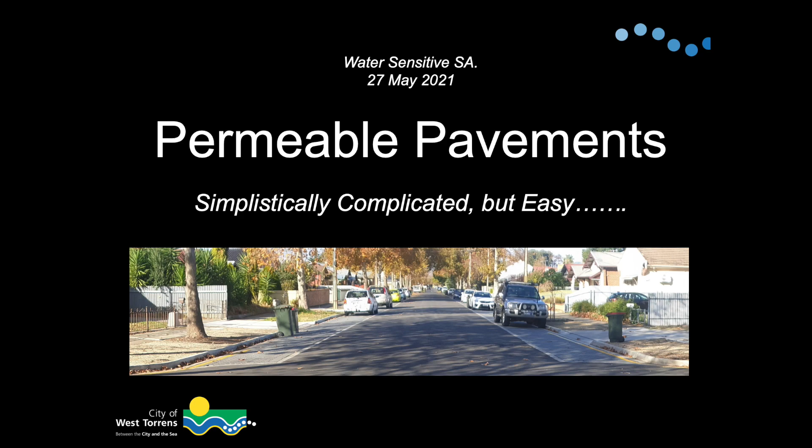I like to have an interesting presentation title, simplistically complicated but easy. And there's legitimacy to that - simplistically complicated but easy, so there's no excuse to not do it.

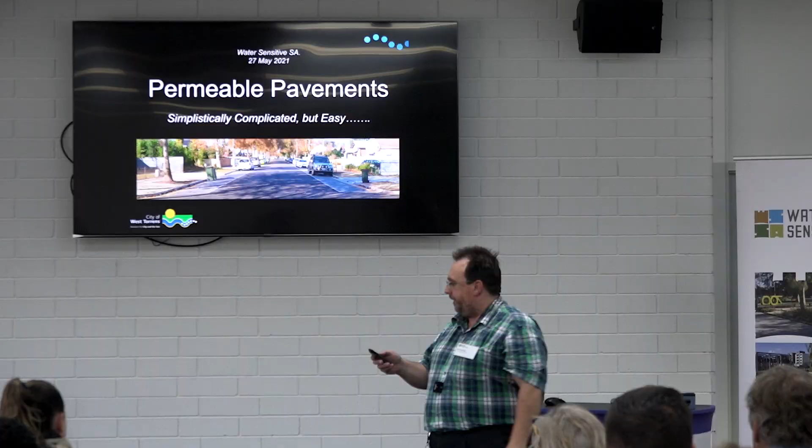Simon, I had an interesting chat with Simon. Simon came to South Australia in 2006 and started talking about permeable pavings the hour after he left off the plane. My first project I'm talking about is 2007. So Simon's presentation convinced me, back that number of years ago, that this is a good deal, get on board, and ever since then they've flourished.

I like to put this up because most people don't realise what's going on. South Australia has a water-sensitive urban design policy by the state government, a policy document - the only policy document I'm aware of in the state that doesn't mention the fact it's a policy document. And best of my understanding is it's still valid.

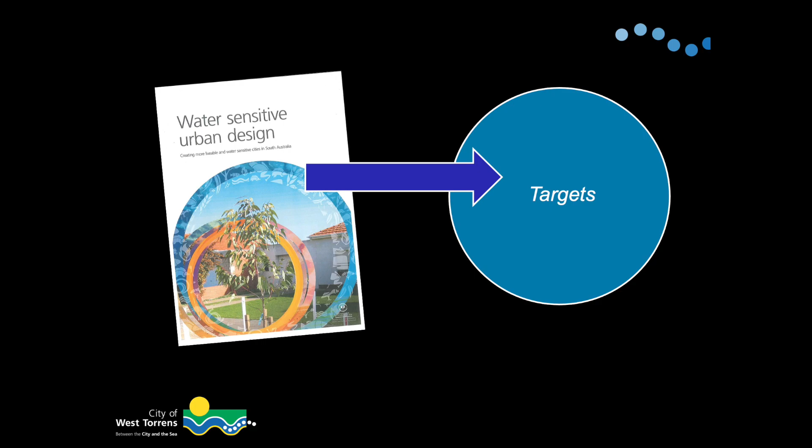That explains what water-sensitive urban design is. Permeable paving is an element of water-sensitive urban design. The other thing that people tend to forget is that document has targets in it. And in part of the new planning system that went live a couple of months ago, there are elements of those targets for the very first time being reflected in the new planning system, in parts of the planning system. So that's one of my side preachers.

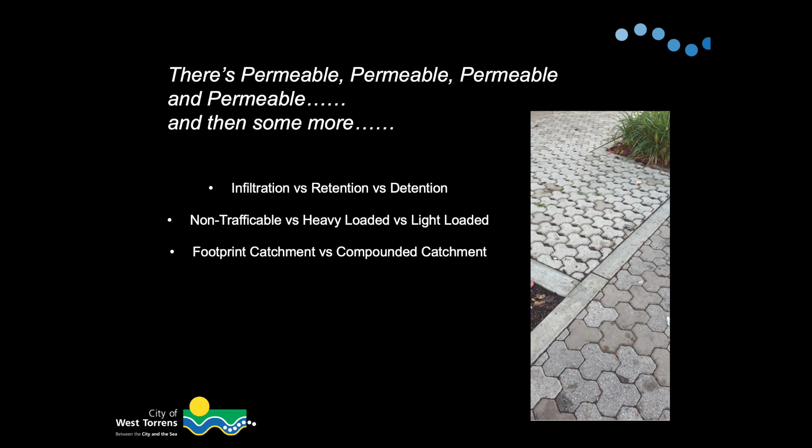There's permeable, and permeable, and then some more. Others have touched on it. I actually think one of the greatest misses with permeable paving is that we use the word permeable paving, but it catches so many different scenarios. And for those that aren't initiated into the gang, there's potentially a belief that it's singular in its use, application, benefit.

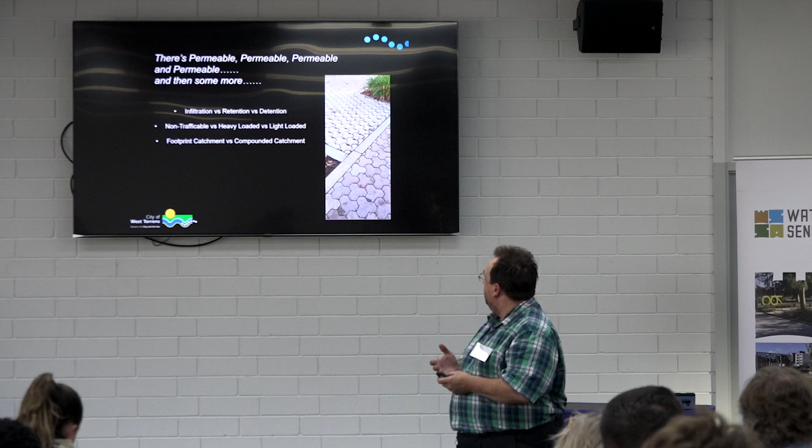You've got infiltration designs which are different from detention designs, which are different from retention designs. You've got trafficable circumstances, heavy trafficable, light trafficable. This leads into - we didn't cross-compare notes beforehand - some of the previous. And then you've got systems which are just the footprint of the installation, but you've got those that also have a compounded catchment, but no more than 1 in 4, because then you get told off. So even looking at that, you've got a dozen to 20 different combinations and variations that you could use.

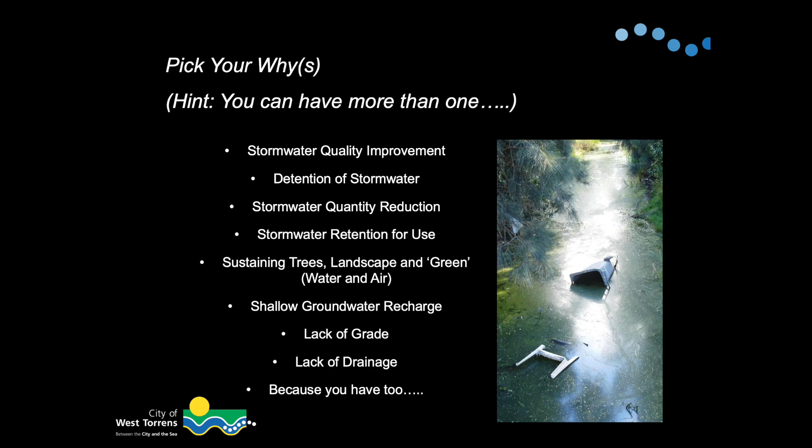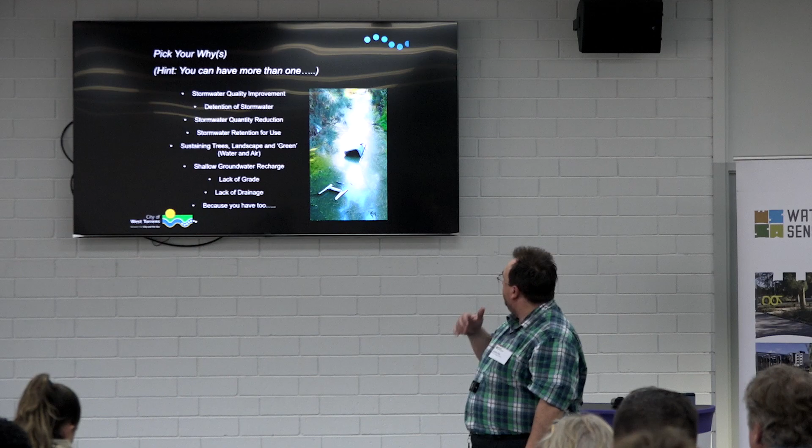So understanding that, but more importantly, understanding why. Pick your why. And the good news here is it's a smorgasbord and you can have all of them, or most of them. You can have as many whys as you want. And we've heard of most of them touched on: water quality, detaining or slowing stormwater, reducing quantity of stormwater, sustaining trees and landscapes, just the idea of putting water back in the ground, offsetting some of the loss of natural permeability of our suburbs.

Some I haven't heard talk about yet is lack of grade. Permeable paving is a great way of fixing a location where you can't get water to grade out, or you don't have drainage. And for some of you, it's because someone else is telling you have to do it. Valid reason.

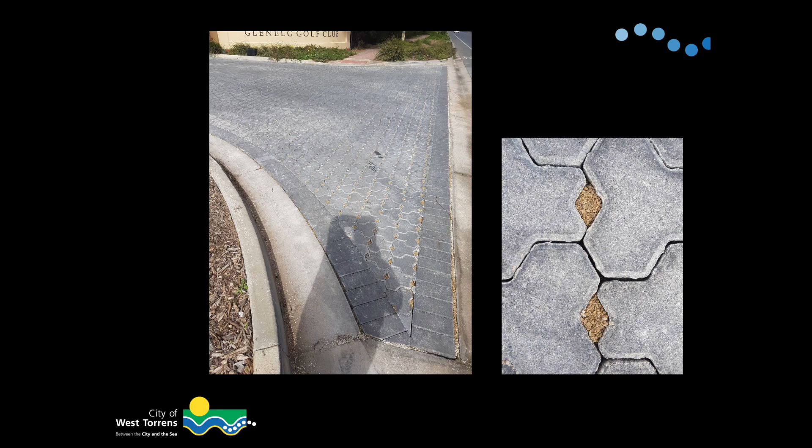This is what it looks like now - permeable paved surface. The reason we actually used this was, again, a lack of grade. West Torrens is ridiculously flat, and our designers were actually struggling to get all the falls to work so that this water off this area, which was imperviously brick paved beforehand, could go somewhere. So this is dead flat, and you can do that because it's permeable.

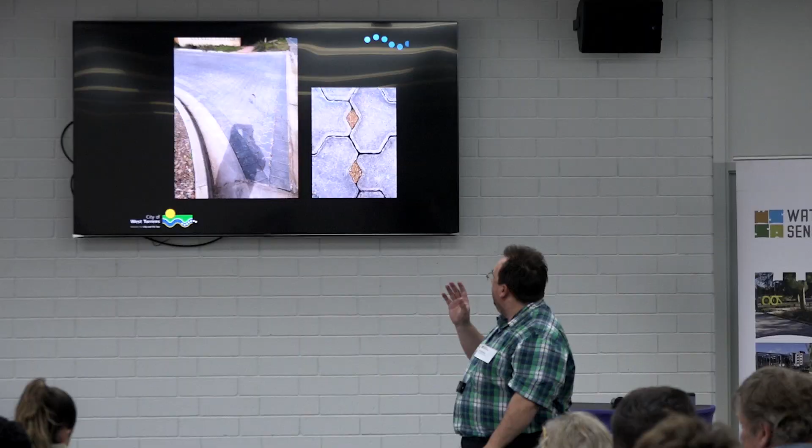The other thing that's noticeable about this is James Melrose is one of those 60-kilometre-an-hour roads where everyone does 70. I should fix that sometime, but so you also then have - it's a long stretch with not too many accesses. So you have people sort of somewhat tearing around this corner and tearing to get out in between breaks in traffic. That brings about lateral shift load.

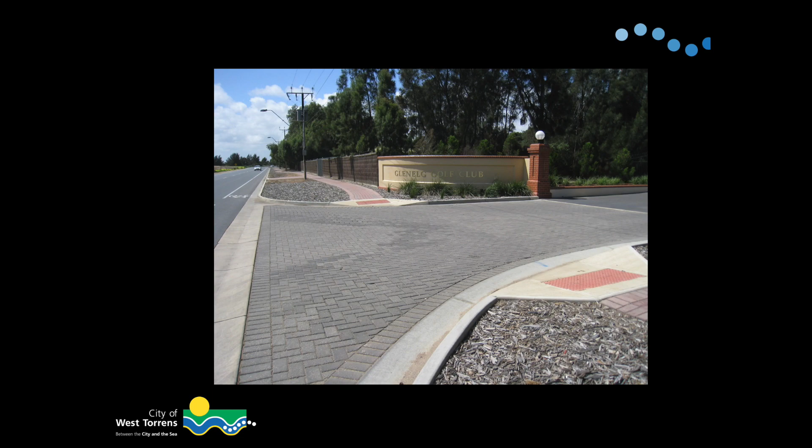That's how it was originally built - rectangular pavers, probably similar to what we saw in the car park out over here because that's what we were using at the time. Anyone see anything in that picture that's giving you some inclinations or hesitations? Or can anyone see a little bit of a colour change in the paver?

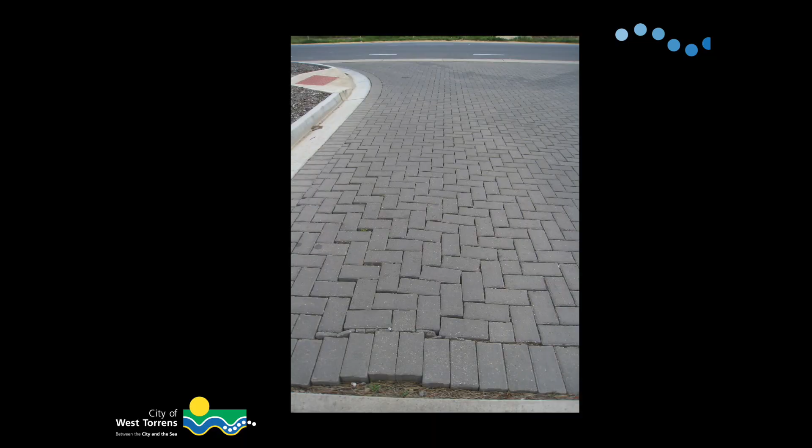Dun, dun, dun! This is why you don't use geofabric, particularly if you have lateral loading of vehicle movements, braking, accelerating or movement. So the traffic moving on that has actually over time shunted all the pavers up to the point where, when you go out there, we were pulling pavers out left, right and centre - nothing was attached to each other. So when we rebuilt it using the Trihex, we ripped out the geofabric layer, put the screenings back down, and the Trihex has been good since then.

That was the detail that it was originally installed to. We probably went overboard with the sub base.

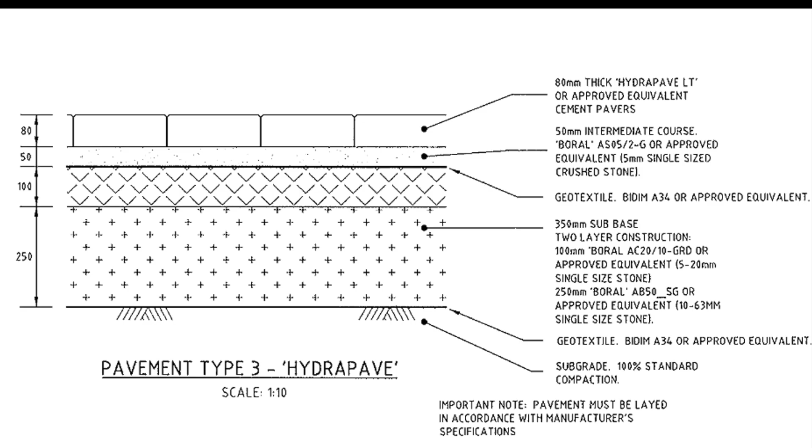There's another project that we worked on.

I have to disagree with you, Simon.

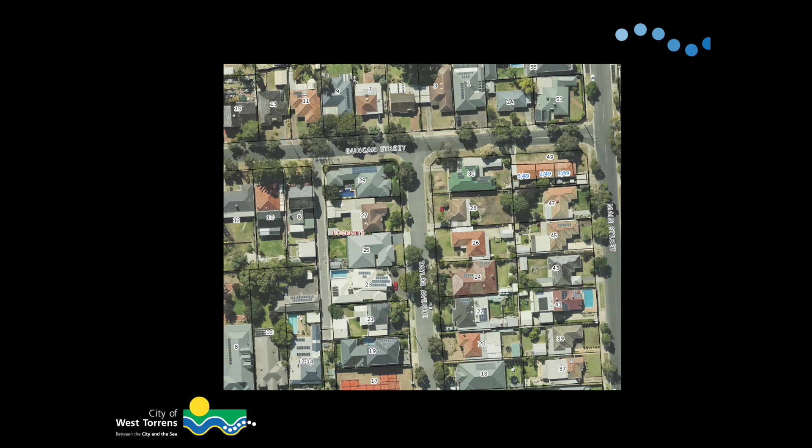This is a 100-year design standard project. Just in here, there's a little laneway.

It's a laneway which all falls downhill towards the no-through end with no drainage. The other thing that doesn't make it too good is that the way Duncan Street is shaped, most of the runoff from in large storm events from the far side of the road actually sheets across Duncan Street and in higher storms can fall straight down into the laneway.

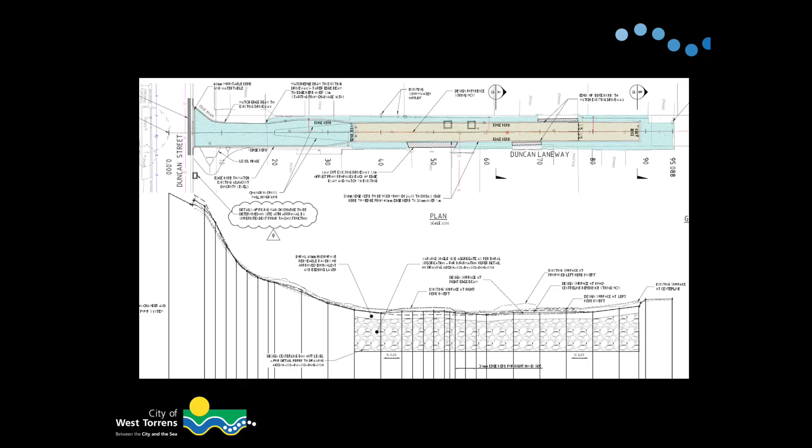So you can see there's Duncan Street up the top. In cross section, it falls down to a laneway which is flat, and there's another house off the bottom end here.

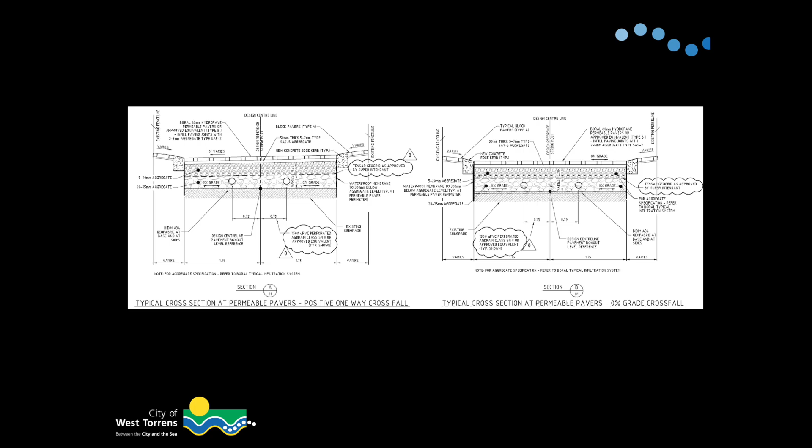The design is pretty similar to what people have talked about. We've actually designed the storage element of this for 100-year storage. It's a project that has a pump station on it.

We've left it with only a geofabric layer on the bottom, so there is some natural permeability to the floor, but the ag drainage there does connect to a pump station.

It pumps the intermediate and larger flows up and out, and the storage volume in there is enough to buffer that 100-year flow event so that we don't get people in trouble.

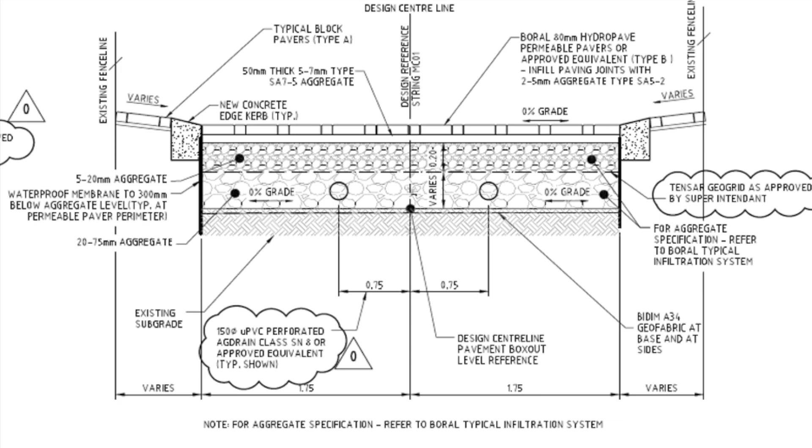We've also, because we're a metre-ish off the boundaries with the permeable, put in impermeable barriers down the side just to discourage sideways movement or infiltration into the side walls to the footings of buildings.

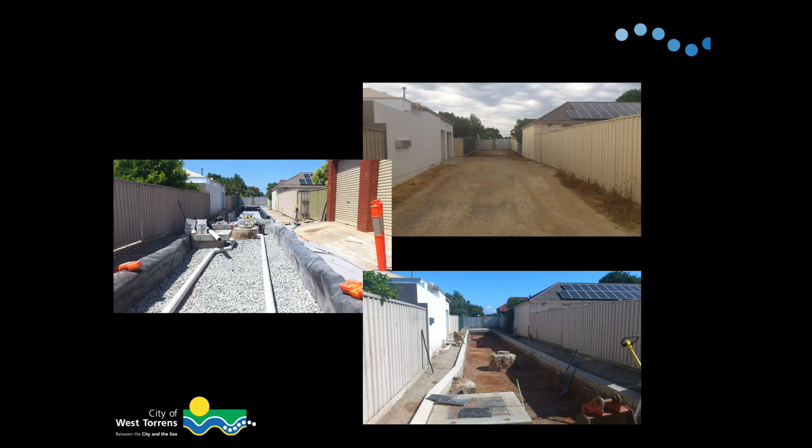In construction, it aligns with what most people were talking about. We had to work around services, and then here's the finished project.

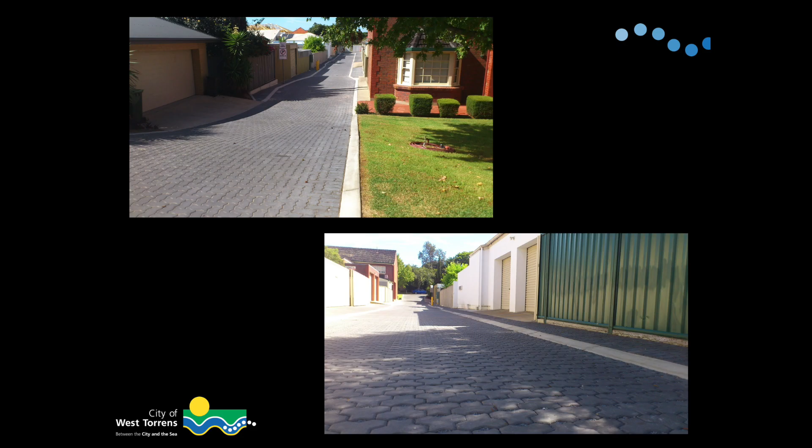Again, most of that laneway is pretty flat. Definitely everything underneath was all cut and squared. Contractors love building this because you cut square, everything is square and level and flat, and I don't have to worry about getting the grades or whatever else.

We wanted to do an urban design project. We got strong public feedback that we needed to keep some of the trees in this street and not reset all the trees in rebuilding the road.

So we took the trees on the right-hand side as you look at it there. We've actually run the concrete ribbon edge beam down the road, a representation of the fact we're right on the edge of the winding River Torrens.

But if you look at them closely, everywhere that ribbon comes out is pretty much on the drip line of the existing trees we've kept.

So we've got permeable paving underneath the drip line of the trees, picking up basically what lands on it. Everything else on the road drains off, so it's not overly saturated, but it's providing benefit to the trees.

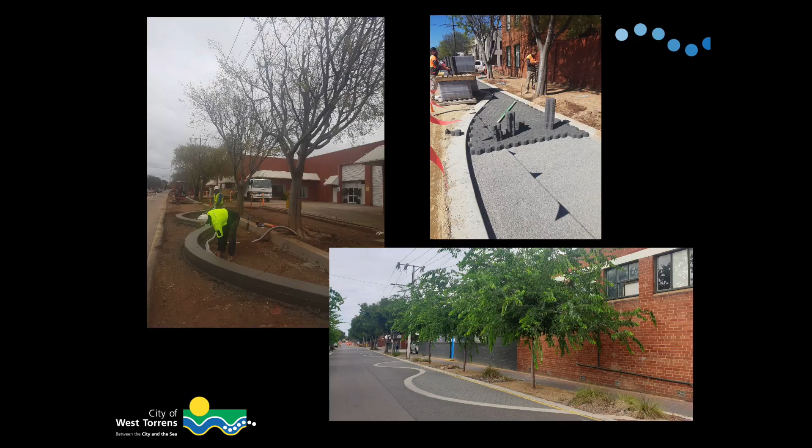The ag drainage underneath—these are new tree installations on the bottom that have just gone absolutely bonkers, A, because they're getting water, but B, because they're also established in a supported cell installation. The pavers going in.

This is the sort of typical design. We've got a relatively shallow formation draining to the ag, and then coming back, and that ag drain is actually draining to wells and infiltration right at the toe of the trees.

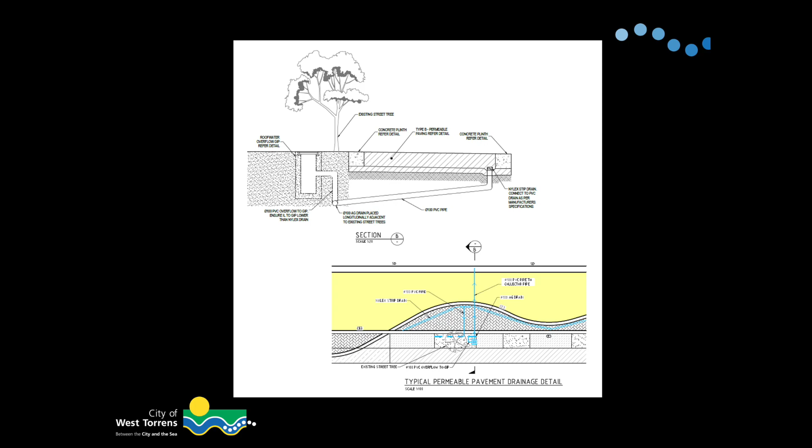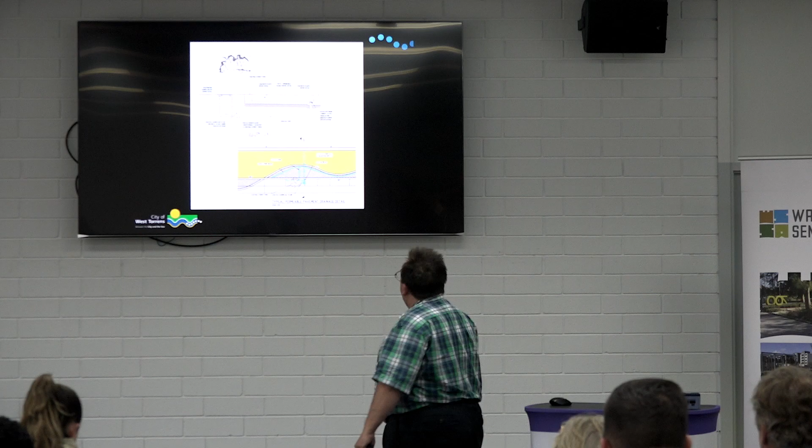If we get the mother of all storms, then it exceeds the capacity of this in a very uneven way, and we would still get overflow onto the road, the rest of the road that falls away, and into the formal drainage.

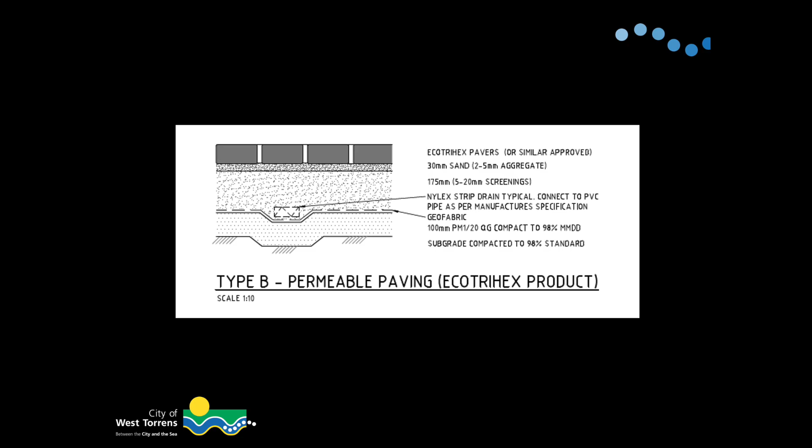175 mils of screenings on the bottom of that one. Again, we've learnt now to put the fabric so things don't slip and slide around. I always forget the name—Stevens Avenue.

With a lot of the stuff that we've done, I used to creatively share with Russell King, who used to be at Mitcham. We thought about opening a consultancy called Chess, two Kings. Sorry, I thought it was good.

He copied some of what I did, I copied some of what he did. We shared details, we refined each other's details, and there's a street in Mitcham that looks very much like that we were doing at similar sort of times. Basically, the car parking bay along the edge of the road, great big plane trees to soak up all the water, full length of the road. I think there's 200 metres on each side of the road of parking bay.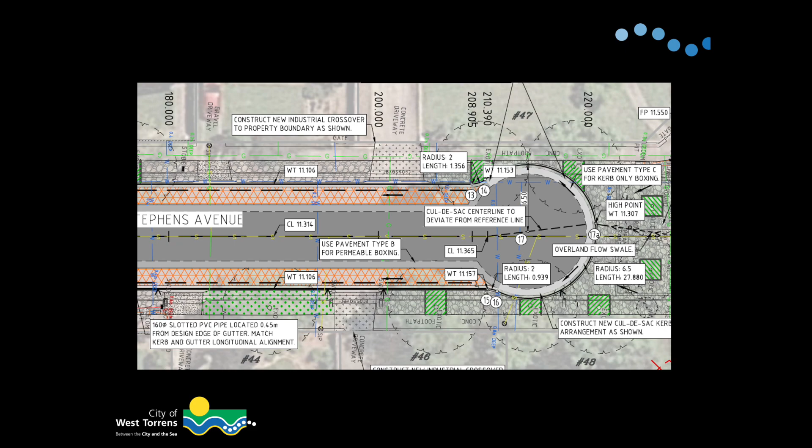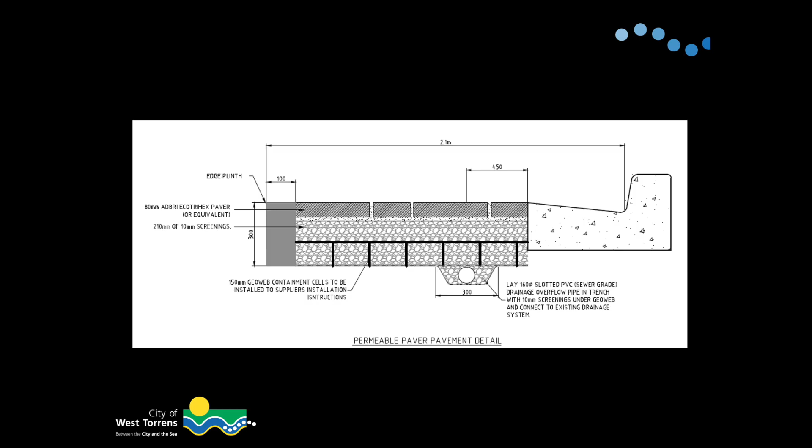We also brought the kerb in to build it further away from the tree. So the permeable is the orange hashed. And again, this is where we started bringing it. These are sort of moving through in time frame. This is where we started using a Geoweb in the bottom to help with shallower depth, and also more support for that base, so it doesn't want to move or sink or move around.

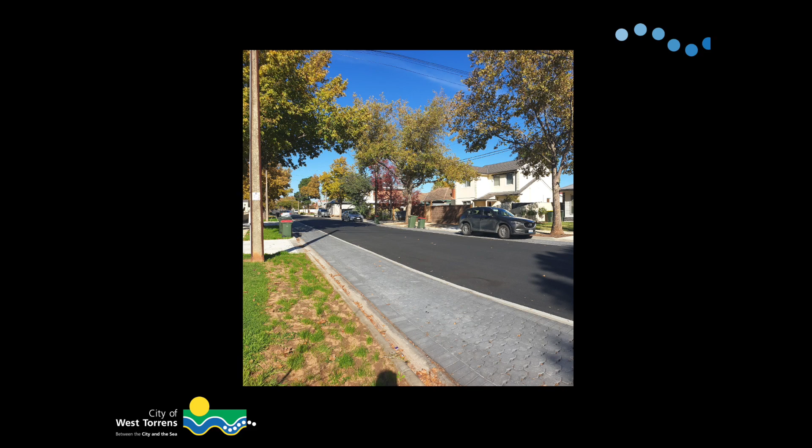That's a photo from this morning. I'm kind of one of those last minute organisers of my PowerPoint presentations, but the photo up the top left is actually the Mitcham project doing the same sort of thing. It was the only one I actually had of an open trench.

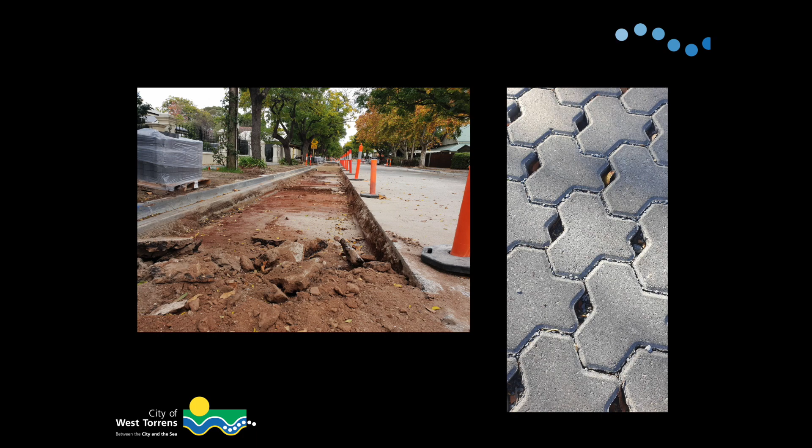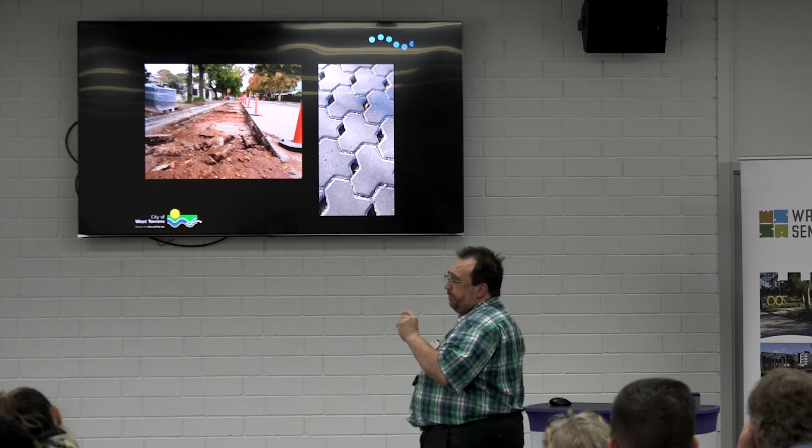The one thing I do note consistently across all our permeable tri-hex projects is the loss over time of the top couple of centimetres of fine screenings in the gaps. And my suspect is it's the bloody street sweepers. Because I think, particularly on this project, where we don't get as much genuine traffic load over it, it's either something to do with car tyres at speed going over and suctioning the fines out. I don't know, I'm guessing.

But given it happens on this street where the cars are predominantly parking, not driving along that lane, I think the key thing that does happen is the street sweepers. So I put it down to the street sweepers. It hasn't really shown too much detriment to things, but we probably should get around and top them up every now and then, send someone out with a bucket of fines and fill them back up again.

We're also going to have permeable, so this is purely just to take, filter through and drain off, get some water quality improvement. We're also going to do some permeable paving in those bottom 4-5 spaces, which we were going to do as a deeper pavement as a storage. We were going to run the runoff from the building direct into that pavement and have a reduced outlet to get a detention benefit by using the pavers for detention purposes, not necessarily pulling a lot of water in from the top. That's that car park again this morning.

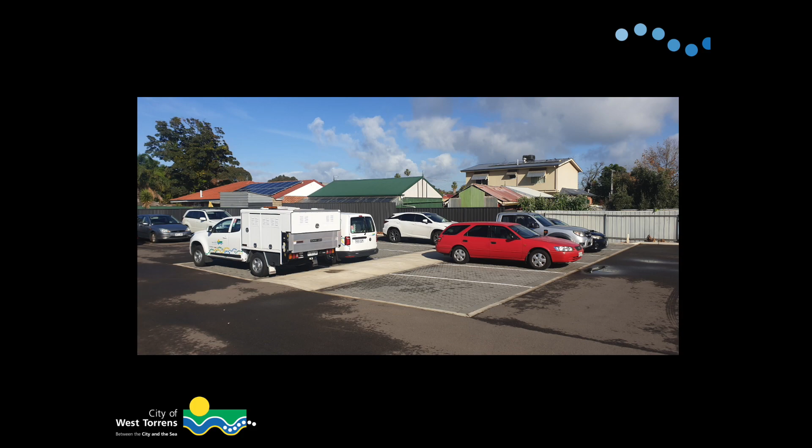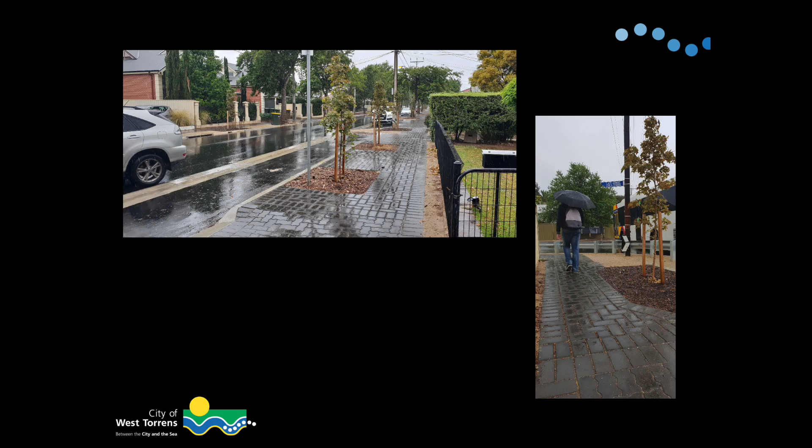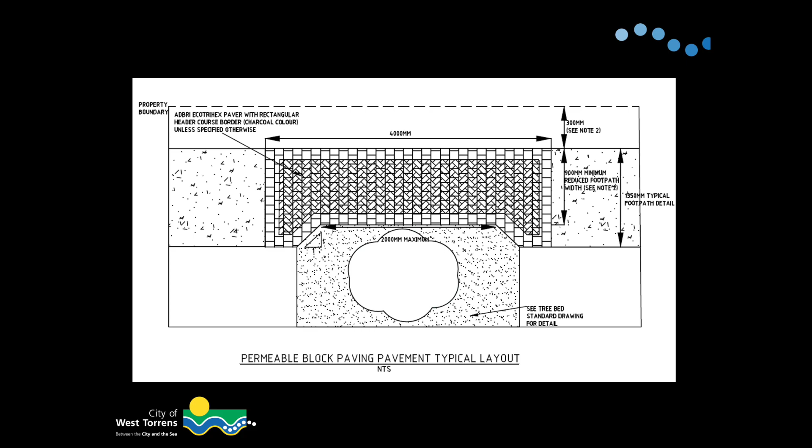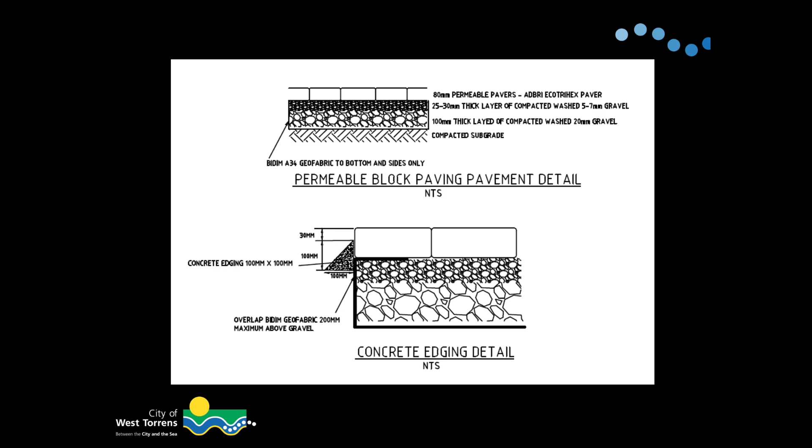Permeable paving of footpaths is another one of these games I used to play with Russell at Mitcham, where we've developed standard details for reduced paving width and permeable, largely because of the benefit it provides to trees. So again, standard detail that we've developed for permeable paver infill. And again, one of the things we've tried to do, backwards and forwards with Mitcham, is we've tried to design this down to a depth and a material quantity that's as closely comparable as we could to a conventional brick paved footpath.

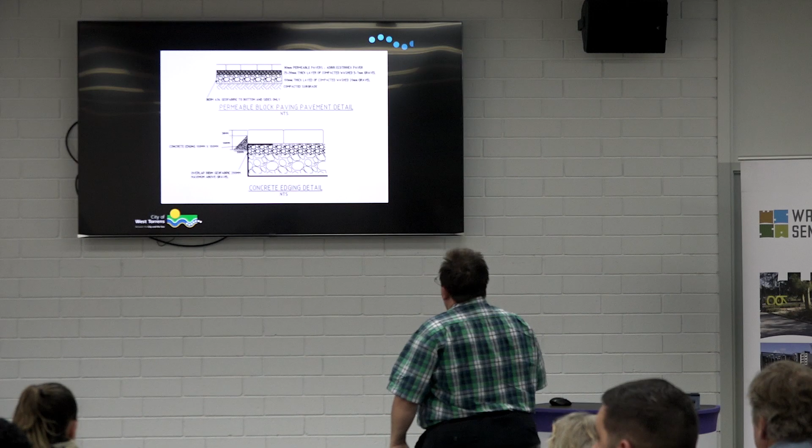Not too far off. Geofabric, wrapped in underneath the brick, and again the edge restraint that Simon said is quite critical. Even though we kind of know what we're doing from it, so that's another project where we've seen all the prepared permeables through the street.

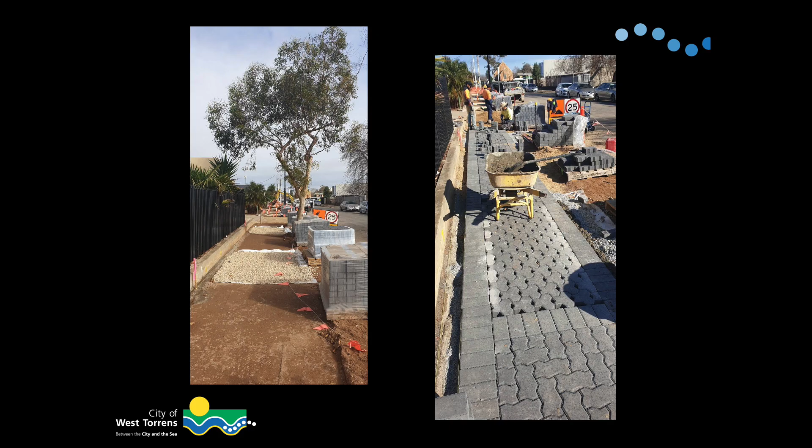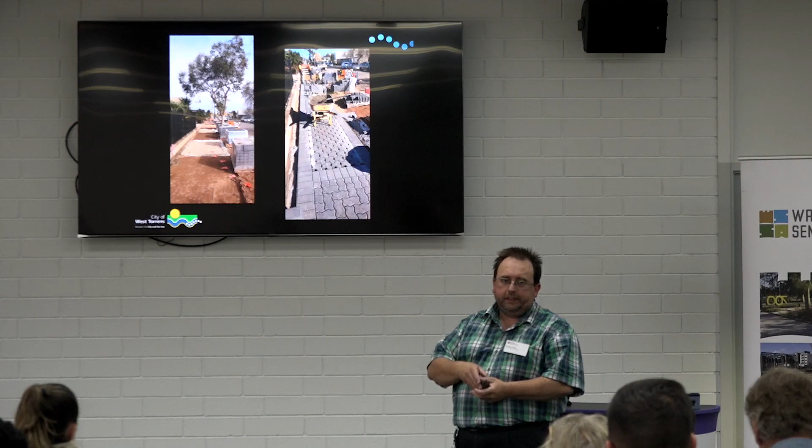There's been actually a lot of conversations with the brick pavers about whether you bring the larger right up to the bottom side of the brick or the finer screenings on top, about what's easiest to work with. Again, if we had one lot of material being brought in rather than two lots, there's a dollar saving to that. And realistically, in my mindset, the finer screenings are predominantly about the ease of getting a smooth bed to put the pavers on. You get a contractor who's happy to use the larger screenings right up to the underside of the paver, there's a little bit of a dollar saving in that.

Mind you, anyone notice what's wrong with that picture? From the detail I showed you before, who's paying attention?

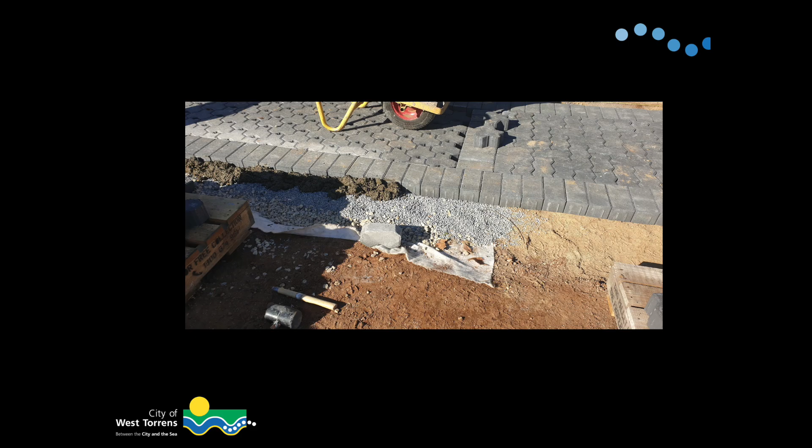You can see the geofabric, you can see the screenings, and they put the concrete on the screenings, and nothing's holding the screenings in. So that concrete is just going to slide out. This contractor lost their profit margin because they had to go back and rebuild the edgings of most of these. So even though we know what we're talking about, you still need to have someone knowing what they're talking about, working with the contractors.

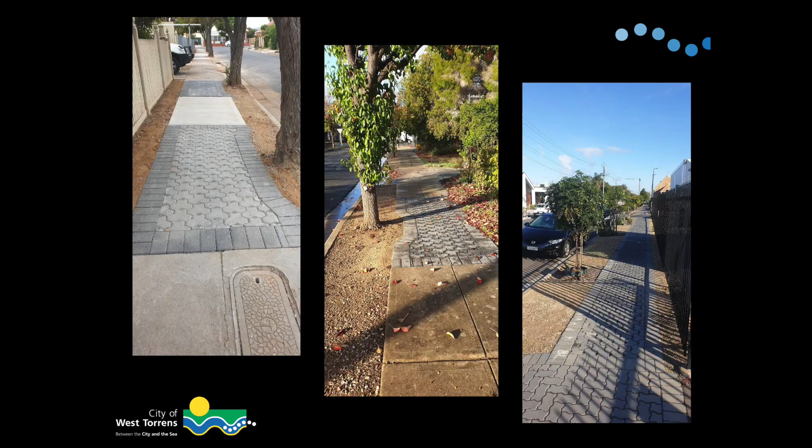And again, same thing. This one was a lot of small trees, so we just did the whole run in permeable rather than trying to break it up. We're patch filling in existing concrete footpaths with the permeable. So instead of just pulling up concrete slabs where they've been lifted by trees and putting more concrete back, to come back in 5 years' time to lift the concrete out again because it's lifted again, instead of putting the concrete back, we put the brick back.

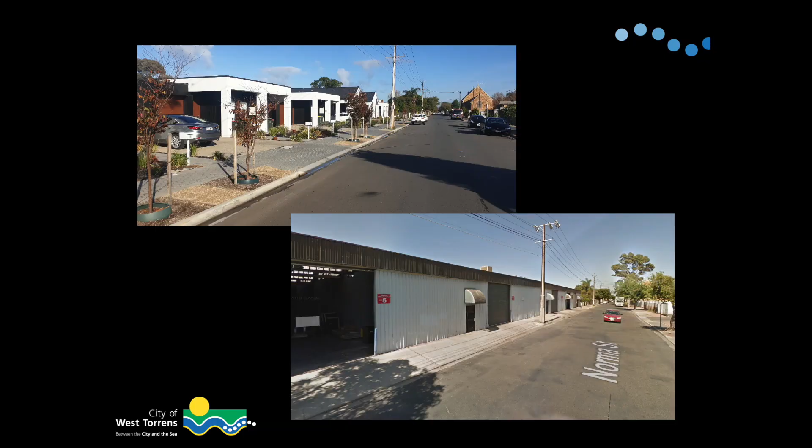Why do it yourself when you get someone else to do it? Pay for it. This street used to be an old industrial garage, went to a residential development, basically the developer had to rip up everything and do everything in the verge. So we made them do permeable past all the trees. Driveways aren't permeable, but adjacent to the trees there's permeable. And the developer paid for the vast majority of that.

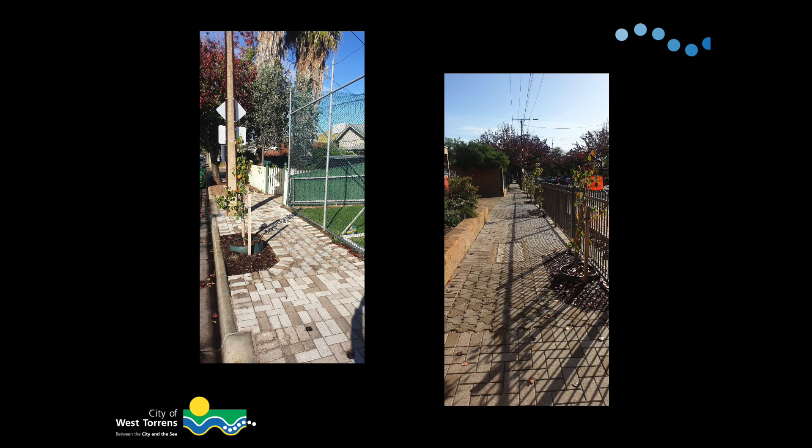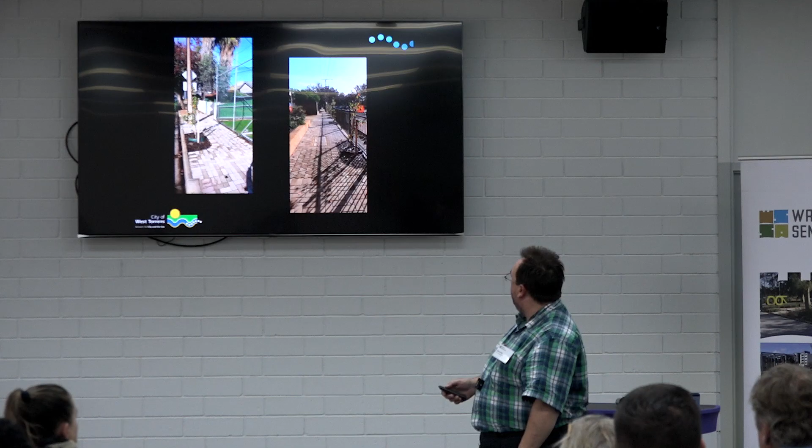And again, even starting to play around with different colours when we're doing more upscaled locations. That colour mix we're actually starting to use more often now because it sits more comfortably next to old concrete footpaths than what the grey does, and mindful that that's probably a lighter colour and therefore has less urban heat impact.

And when you go to something which has the tri-hex pavers all the way through, and I think Simon or one of the other speakers mentioned it, here's your impervious surface blending straight into the permeable surface, with changes in formation underneath, obviously, but someone walking over the top of it isn't really going to notice.

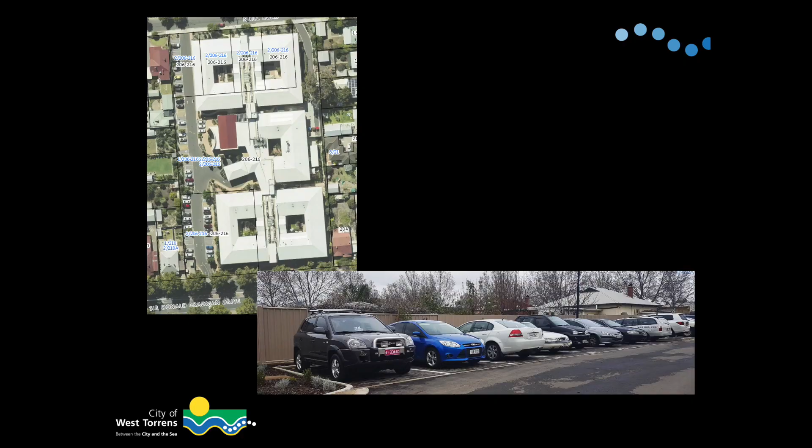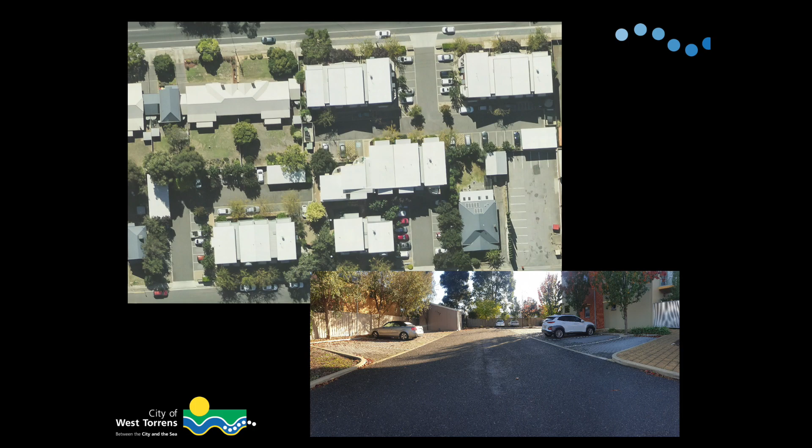Developers, simple and easy. A nursing village, nursing home, all the car parking spaces are permeable. The roadway is paved, exactly what we've seen before. An affordable housing multi-storey unit development. So affordable housing, you think trying to reduce price. Again, same principle. What convinced them is that they were actually able to undertake most of the stormwater detention for the site in the pavers rather than having separate tanks.

So when they offset the fact they had to put tankage in, and you just add your paver depth a little bit deeper, the formation underneath a little bit deeper and achieve it in that, suddenly they were sold on that. What's good about that and the development thing, so we were talking about legislation versus bottom-up versus you convince them once and they come back.

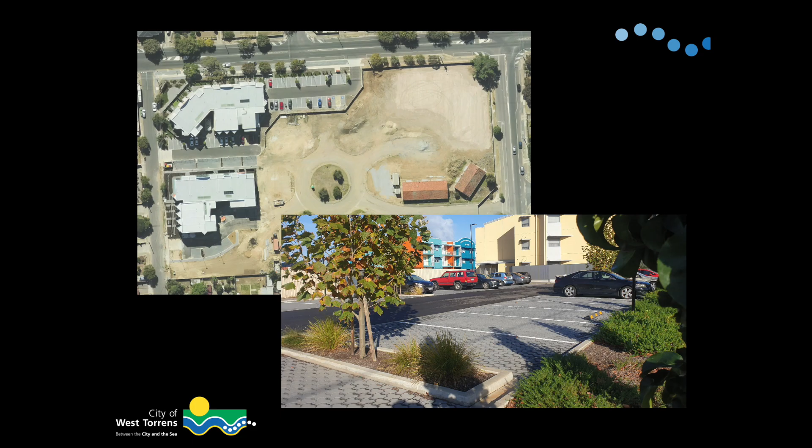Same developer is now developing that whole block of land with these multi-storey affordable housings. Every single one of these car parks came to us the very first time we saw the design with that car park approach from the other side. So there was no hard sell because they had already realised the benefits on the previous job. They came to us with it already on here. So you break your kahunas once and you get the ongoing rewards.

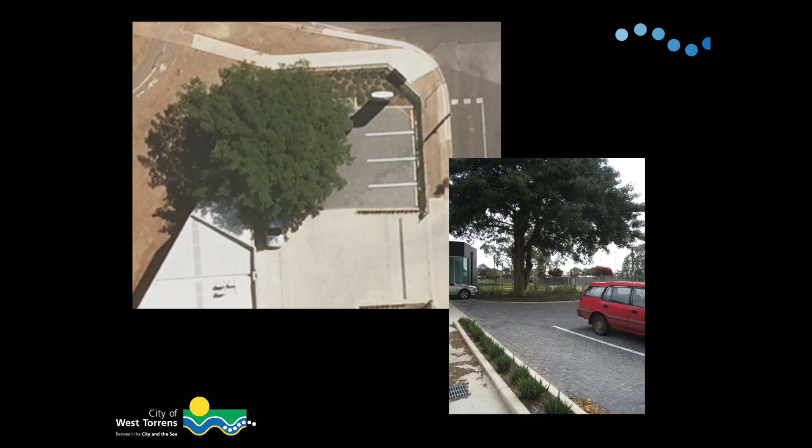And that's an earlier one, big tree, paving around it. Keep your eyes out, you see it everywhere. One of the main streets in Stirling is all permeable. Bottom right-hand corner is the childcare centre I dropped the little one off to this morning. You learn from others. I've got my Sydney Olympic Park. I was there two and a half years ago.

The other thing that no one else has mentioned, one of the things that gets thrown at local government regularly about use of permeable pavement is high heels, particularly with the trihex. I haven't heard anyone mention that. This is my uniqueness. Sydney Olympic Park now is a major function centre. Hundreds of thousands of people, and that permeable, I've shot the wrong direction, is right next to the rail terminal, which is how most people get there.

Everyone coming to that venue from the rail terminal, which is the majority of the thousands and thousands of people, would walk that permeable to get from A to B. Everywhere we've installed trihex in our council area, not once had someone come to us and say they had a heel issue with the footpath trihex.

You get influenced by others, then you can influence. My moment of fame with gardening gurus that had heard about the project and wanted to come and see it. And you don't have to be begged. That's my little backyard. I made my own permeable pavement area with just using normal bricks and a bit of agricultural treatment.

Philosophical moment. You miss 100% of the shots you don't take. Harass developers, harass everyone else in your organisation. You're bound and guaranteed to get some projects going. You're bound to get some good feedback. You're bound to get a momentum and things rolling. And if I can leave you with one message, just do it.